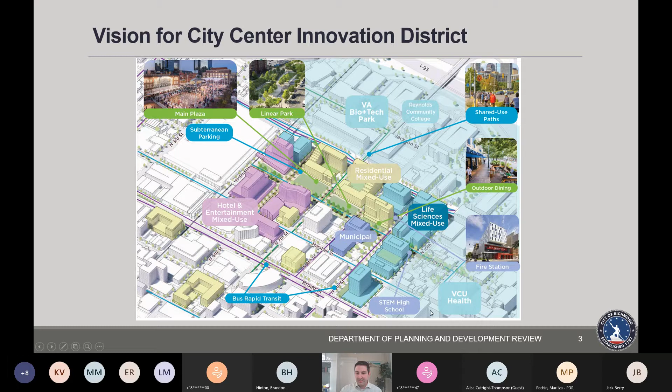As you can see here, these are some of the things that we incorporated in the plan in the picture and location. As we mentioned throughout the plan, every building doesn't necessarily have to look like what's shown here on the rendering, but this is kind of just our general idea of what we're looking at. If you can see my mouse here, this is where the Coliseum is. So we're looking at adding residential mixed use, hotel entertainment, and also a lot of green space, potentially a main plaza, linear park, things of that nature, and also the educational services closer towards the VCU side.

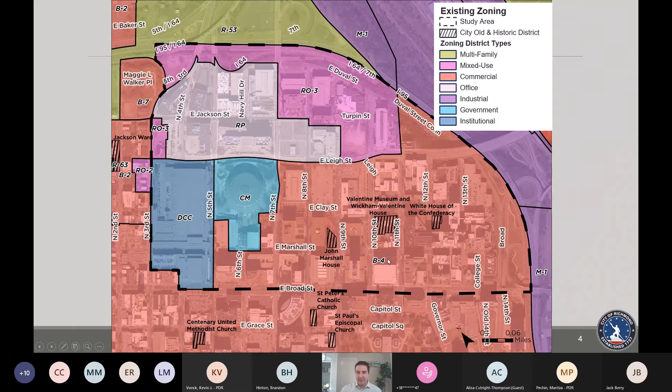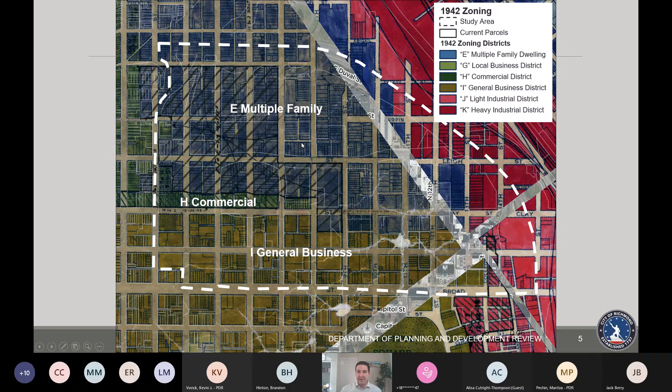But as you can see, a lot of the northern part of the city center area was multifamily. It had very high density residential area that we're really looking to bring back in this plan and in this rezoning. And if you look at the city center plan, that will provide a much more in-depth, detailed timeline of the residential population in this area.

So if you haven't been able to look at that, I really encourage you to go to our website and look at the plan for the history and also just the plan in general.

So that's where we have to look and see how can we rezone this area to align with all the goals of the city center plan and the Richmond 300 plan as a priority growth node.

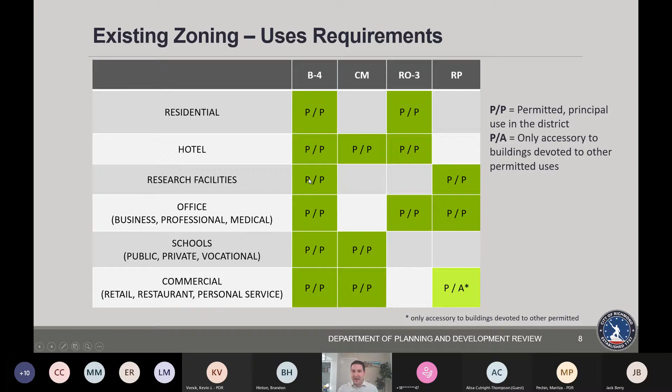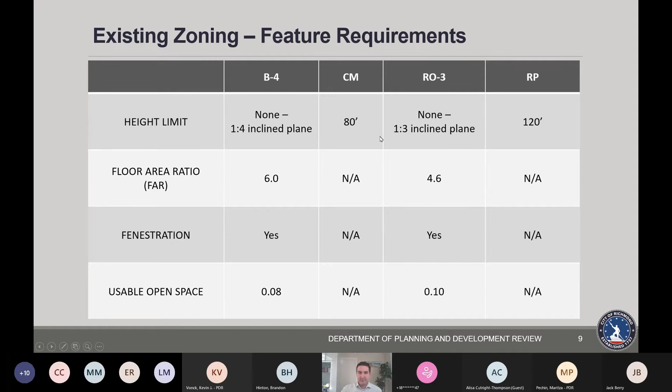Going back to the inclined plane in the B4, it says there's no height limit, but you take the center line of the abutting street and do a rise over run. So for every 1 foot horizontal, you can go up 4 feet, and you draw an inclined plane to the parcel line.

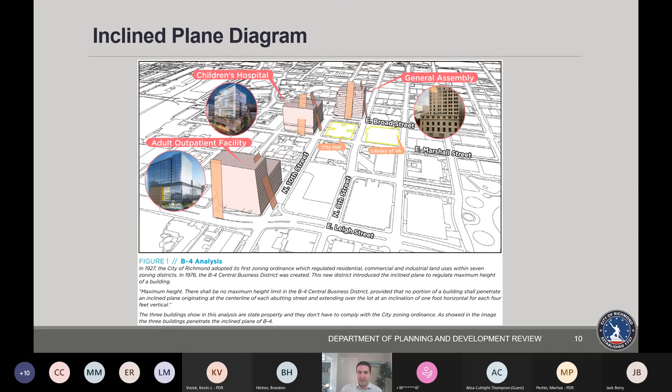Here are some examples of recent buildings that were created, whether through VCU, the General Assembly, or the state. As you can see, all three of these buildings penetrate the inclined plane. But since they're through VCU, the state, and also federal buildings, they do not have to comply with underlying zoning. If you've been around downtown and look at these buildings, I don't think you'd say they're completely out of character for the area, especially since we don't really abut too many residential buildings at this time. But this was really just something we looked at with the B4, and with the uncertainty of the widths of certain streets, this is something we looked at and maybe we should allow or bring over, or maybe we should remove, for the proposed rezoning.

To give a quick definition of floor area ratio, that's another thing currently in the B4, but not in the CM or the RP. It pretty much says it limits the amount of floor area on a lot for each square foot of land area. So this is another thing that can impact height.

If you have one large lot of land and you're only allowed a 1-to-1 ratio, you can either make it one story and take up the entire lot, or you could decrease the size of the building horizontally, but then go up a floor. Similarly, the smaller the coverage of the land, the higher up you can go.

Currently in the zoning ordinance, we have floor area bonuses that encourage people to provide certain things such as dwelling uses, enclosed parking, and improved roofed areas. Those allow you to increase the floor area ratio to get that additional height if those features are included in the building plans.

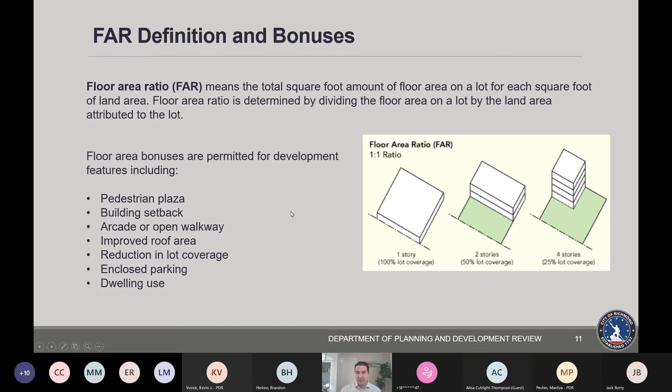So when we were looking at the city center plan, we looked at some zoning considerations. I briefly mentioned some of those feature requirements, but when we were looking at rezoning it, we knew we wanted to change the current B4, RP, RO3, and CM to potentially a new zoning district.

In the city center plan, it talked about creating an innovation district, but maybe using existing zoning districts could be a possibility as well. But as I've mentioned several times here, we really just want to allow that residential use by right in the city center area.

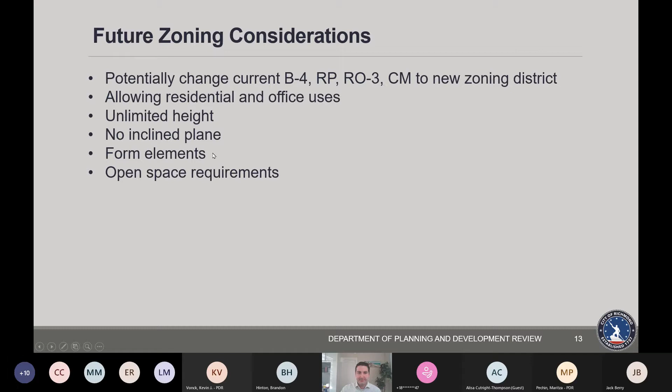So what we want to do is keep all of those existing uses that are there in the RP, but then add in the residential, add in the hotel, add in the commercial allowed by right.

So that will decrease—I'm not aware of any non-conforming uses that will be created by this proposed rezoning, but that's our goal. So if we're not aware, or if there's any out there that we're not aware of, please let us know and we'd be happy to look at it.

So these are the uses that we're looking to bring over, but we're also looking at adding those feature requirements that I was discussing. So this last column here, we're looking at removing the height limit and also the incline plane.

Because as I mentioned, we're not potentially sure of the width of the street, and we don't really want the incline plane to impact the height of the buildings, but potentially we could keep a floor area ratio to keep that form, so we don't have an entire block, just a massive building that takes up the entire block. So maybe we have some more form-based elements in these buildings to provide that light and air that the incline plane was intended to do.

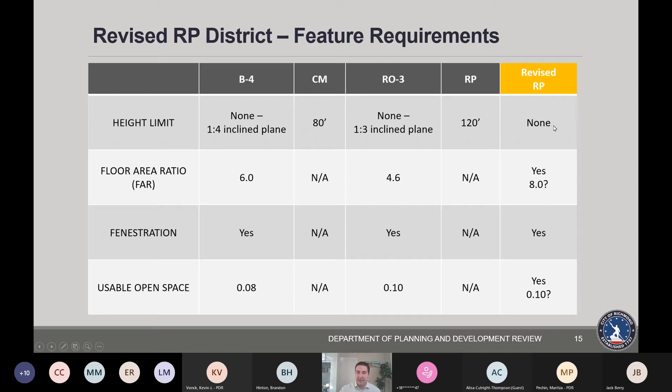So that's what we're really looking to do. Our intentions are to revise the existing RP district and then expand it out, as I'll show you here in a little bit.

But obviously that's going to take a few years to develop. So we thought at this time, rather than creating a brand new zoning district, which could take more time, we want to use what we have and just expand it. So we're very interested to hear any thoughts about that, but that's kind of what we're looking at this time.

I can come back to this slide if we need questions and answers. But the next steps we're looking at: we have our meeting tonight, and we had a resolution of intent that went before Planning Commission on March 7th of last month. So we've used this past month and a week or so to look at these changes in the zoning district and changing the maps and coming up with these ideas.

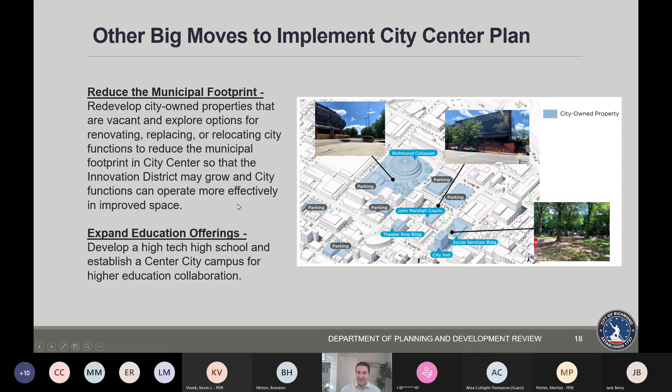And then also talking about the life science industries and education, we really see this as an innovation district, not only for the city, but really the area and the state. So we want to potentially develop a high-tech school and establish a city center campus for higher education collaboration.

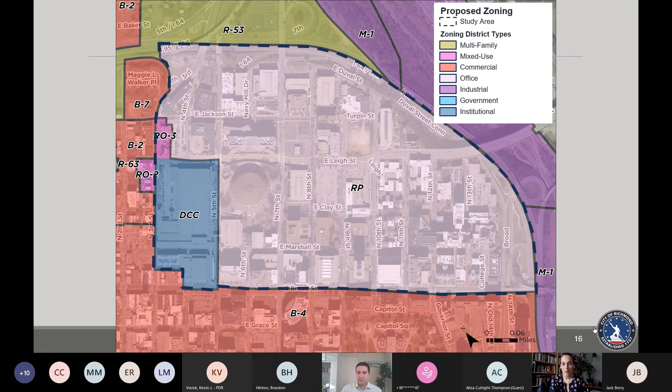I was slightly unsure how many people would come to the meeting, because this is a property, this is an area of the city that has so much single ownership of land. And one of the biggest landowners in this area, actually two of them, the state and VCU, don't have to follow zoning. So yeah.

And this presentation that I gave today is also online on our website. It's titled April 13th presentation. So if you want to go back and look at the proposed zoning map or any of those feature charts that I presented, and if you have any questions after reviewing that further, I'd be happy to answer them.